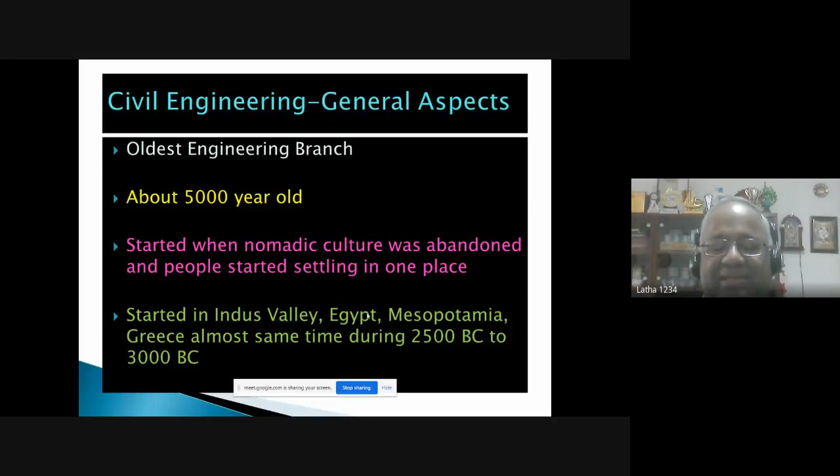At one point of time, they all felt it is good to stay at one place and try to live peacefully. So when that type of thinking came, people started reducing nomadic culture and started staying in one place. So when people were staying in one place, that is the time actual civil engineering started. If you know the history of the culture of people, the Indus Valley civilization started almost 2500 years before the birth of Christ in the Indus Valley.

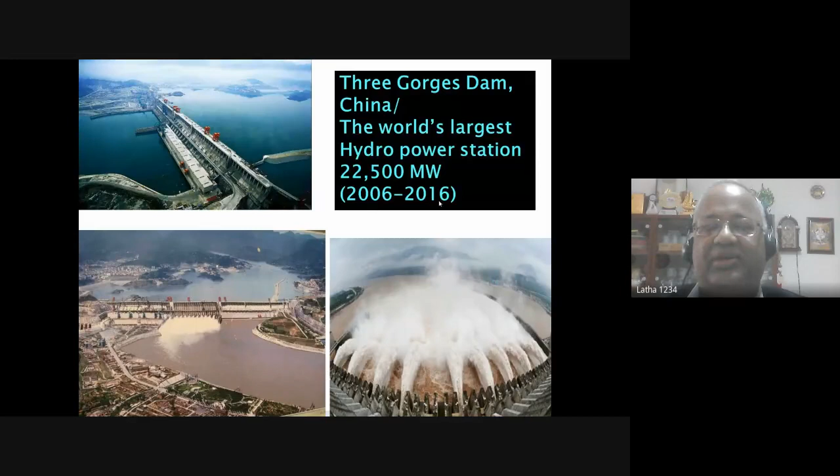Water retaining structures are an important element in civil engineering, like reservoirs and dams. One of the biggest dams built on earth is the Three Gorges Dam in China, with a hydropower capacity of 22,500 megawatts. Started during 2006, completed during 2016, in 10 years. So this is one of the marvels in civil engineering.

So like this, you can show thousands of examples of the marvels and the knowledge which has gone for infrastructure development, which is the basic requirement for any human being nowadays. Basic requirement for a human being, fundamental, basic, is house, road, water movement structure, sewage movement structure, reservoirs, bridges,

traveling, setting arrangements in hills, in valleys. So these are all the very, very basic requirements. And this is what a civil engineer is supposed to do. So with this background, I will now start the actual presentation.

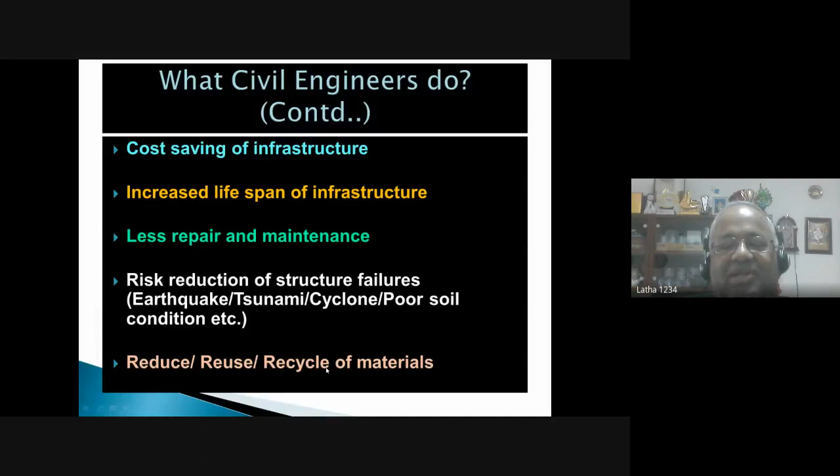And then the civil engineer also learns how to reduce the material used for infrastructure, or how to reuse some of the material. For example, waste plastics available nowadays, civil engineers use them for road construction for quality roads, or even recycling of material. Waste steel is recycled again as reinforcement. Waste plastics are recycled as good quality construction material. So these aspects also the civil engineer knows.

When I talk about civil engineers, the very noble person we all need to know is Bharat Ratna Sir Visvesvaraya. The whole of India celebrates Engineers Day by his name. He is a civil engineer. We all should feel very proud that a civil engineer is behind the Engineers Day celebration in India, not any other branch. I personally feel very proud as a civil engineer because of this, because he was the one responsible for developing many high quality dams and waterway infrastructure in India.

So now let's come to latest technology. For example, over the last 25-30 years, these items I'm going to mention have all occupied civil engineering development. Many new types of materials people started using.

A lot of lightweight concretes were invented, which people started using to make sure the building is light. And self-curing concrete was invented to accelerate the construction and curing process.

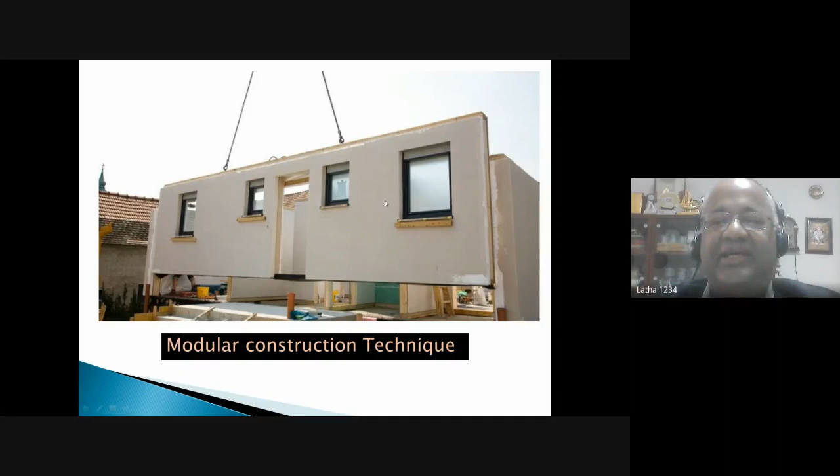These are all in the latest technology. For example, modular construction: nowadays people divide a building into a number of components. Say you need a home - people divide it into 10 or 15 components. Each component is made in the factory like a module, brought to the site, and assembled in a few days. That is the modular construction technique, so you need not spend a lot of time at the construction site. These are all made easily in the factory and then assembled within no time.

Higher and global education opportunities for civil engineers: after BE, you can go either to ME, MTech, or MS. After finishing that, you can go for a PhD. Some promising fields are structural engineering, geotechnical, environmental engineering, water resources, construction management, urban development, coastal and ocean engineering, remote sensing applications, and many more. These are all very promising for higher studies.

When we talk about jobs, everybody is finally interested in a job, whether in engineering or any other discipline. Basically, you can divide civil engineering jobs into three categories: either you work for government, state or central, or you work for a private company doing infrastructure development, or you can start your own industry.

Civil engineering is one of the best fields in engineering for self-employment. Nowadays many youngsters love to start their own industry. This is a trend we see now because of ease of getting loans from different government schemes. So people love to start their own construction industry, and it is really a good option, in fact.

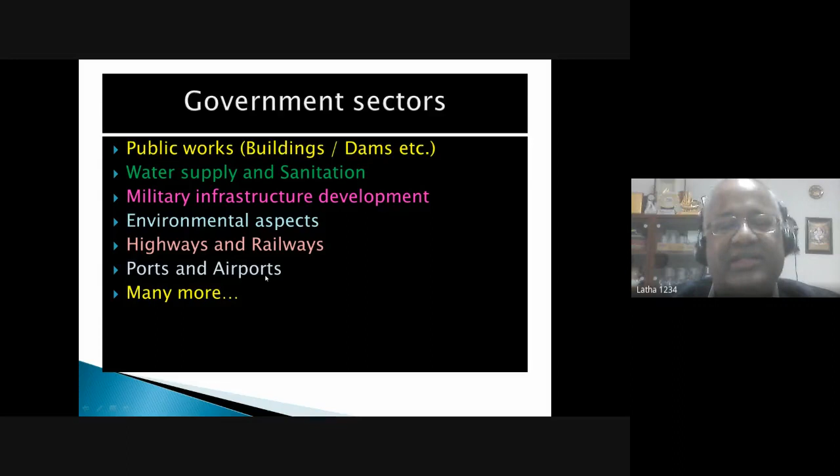So you work here as an environmental engineer, or you work developing state government highways or railways, or developing and maintaining ports, or developing and maintaining airports. Every port and airport needs civil engineers, and many more such roles. This is all under the government sector.

In central government, some are PSUs - public sector undertakings. Most of them have shares in the Bombay Stock Exchange and National Stock Exchange. In India, some of these are Oil and Natural Gas Commission, National Thermal Power Corporation, Indian Space Research Organisation, Defense Research Development Organisation, Bhabha Atomic Research Center, Engineers India Limited - they take a lot of engineers - and Gas Authority of India Limited. Like that, the list goes on.

Central Public Works, Coal India - engineers working in Coal India are responsible for exploiting coal fields. Indian Railway Construction International, and the Government of India also has the National Building Construction Corporation. Like this, many PSU companies are available for civil engineers.

After 4 years of engineering, if you write the Indian Engineering Service Examination through the Public Service Commission and get selected, you will work directly for the Government of India in many subsectors like Border Road Engineering Service, Central Engineering Service, Central Engineering Service for military road transport, and Central Water Engineering. There you will work to connect rivers or construct infrastructure in river and coastal areas.

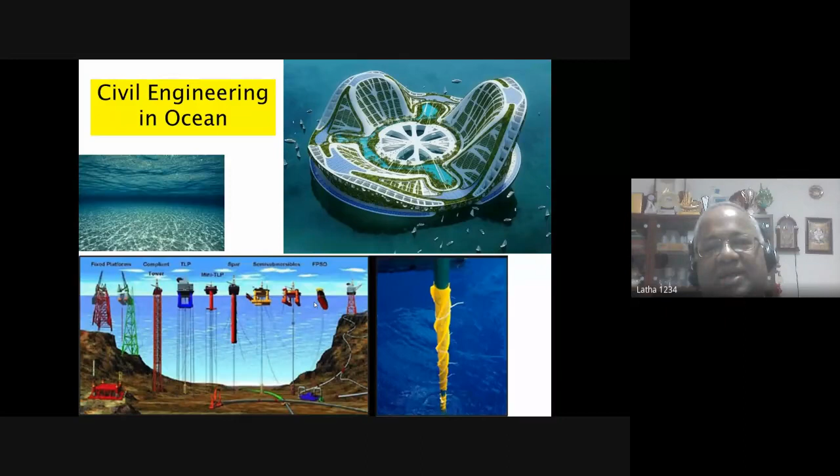Engineers working in the ocean to develop infrastructure, like floating homes or oil and gas drilling infrastructure, are well paid compared to normal civil engineers. Their salary is high because they have to design for a challenging environment and work in it. It's a risky job, but that is the joy of it. So they get a little better pay, civil engineers working in the ocean.

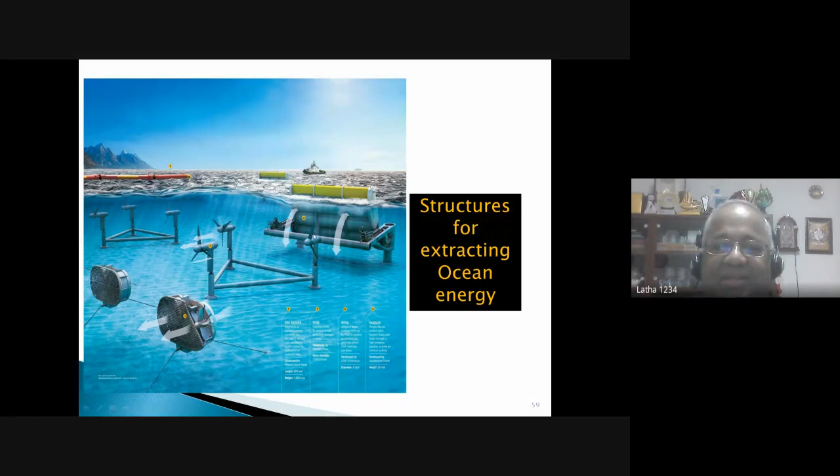Civil engineers develop infrastructure like coastal infrastructure, ports and harbors. They also develop infrastructure for extracting energy from the ocean. Though the final objective is energy, you need civil infrastructure. Without civil infrastructure, it is not possible to extract energy. So a civil engineer is required.

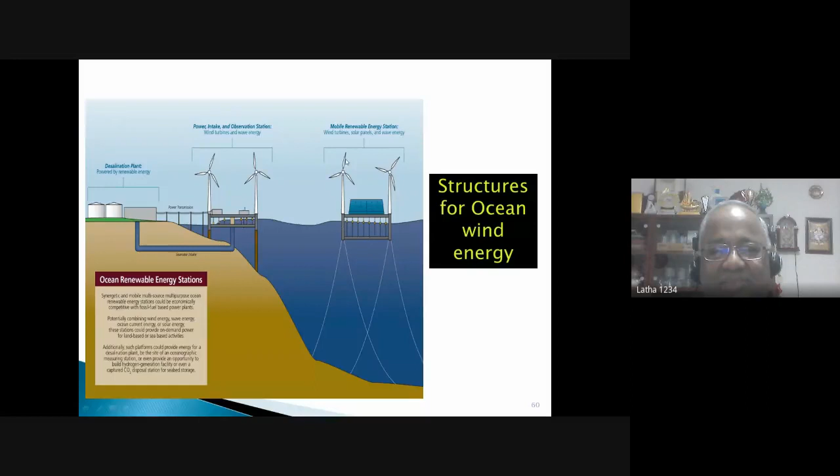Even for offshore wind energy, you have to build civil infrastructure. Or to extract energy from tide, you have to build a concrete barrage, like a concrete dam.

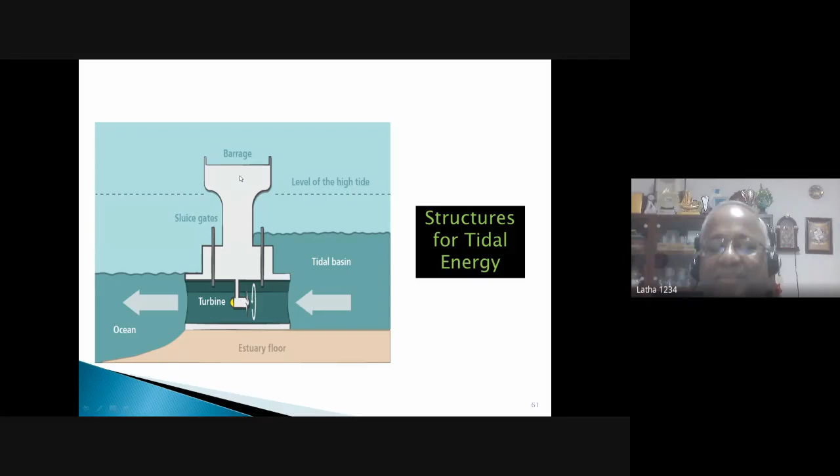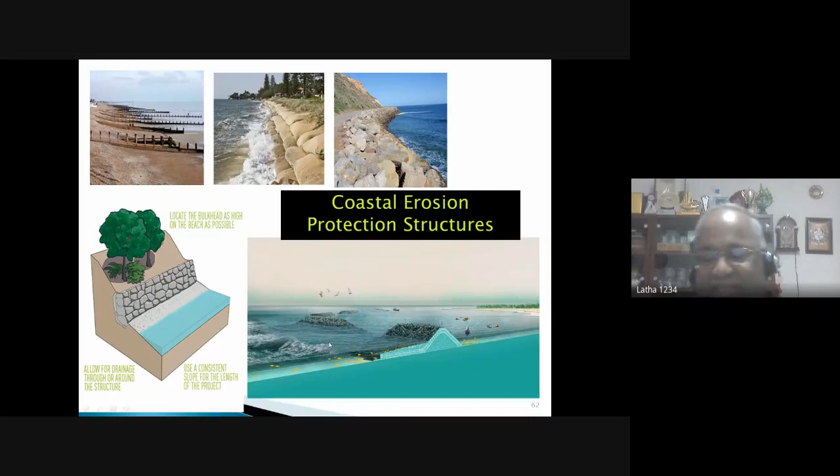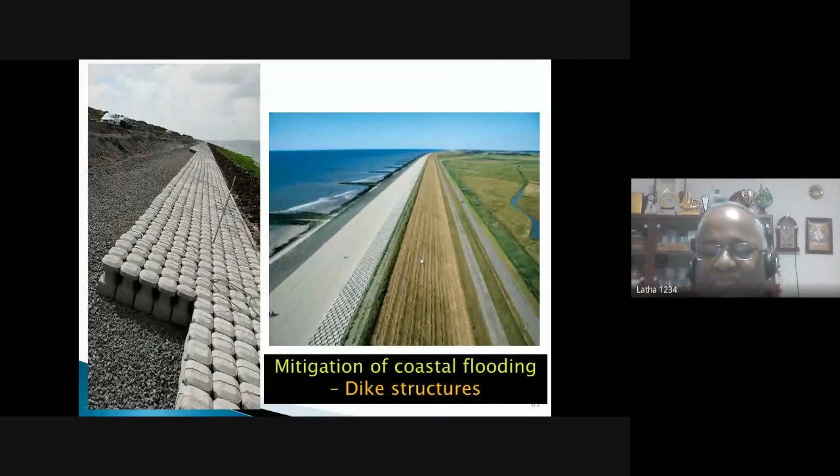These are all typical civil engineering structures. In the Netherlands, it is called a dike, a civil engineering structure. When the sea is rough, it will try to overtop into the land; to protect against such overtopping, people build this infrastructure. A very typical civil structure, but the knowledge we have to learn through proper courses.

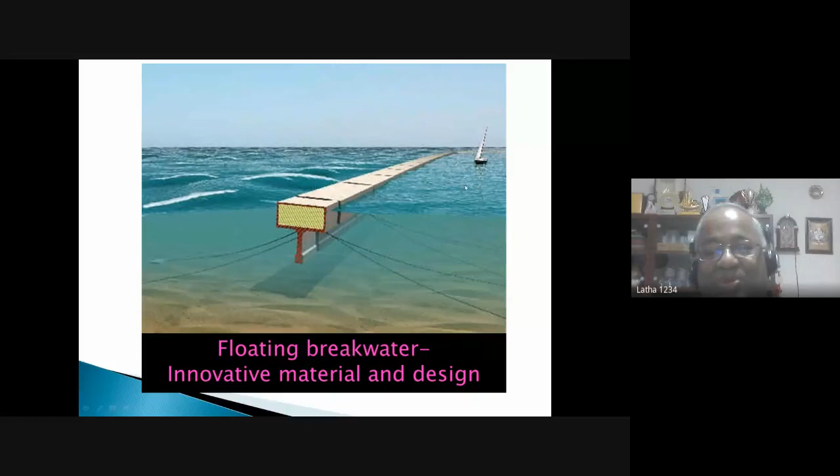Our people build innovative structures like this. It's open ocean here with waves, and civil engineers design what is called a floating breakwater. You learn all these things to make sure the waves here are very small for port operations, or even for construction, since people do construction in the open sea. So you need civil structures like that.

Or people make a new type of marina, where pleasure boats are parked, similar to car parking, but it's boat parking. These are all our inventions, civil engineering inventions applicable to coastal areas. We have patents for all these things. So you make concrete structures, beautiful concrete structures, which are not only cost effective but easy to build and easy to maintain.

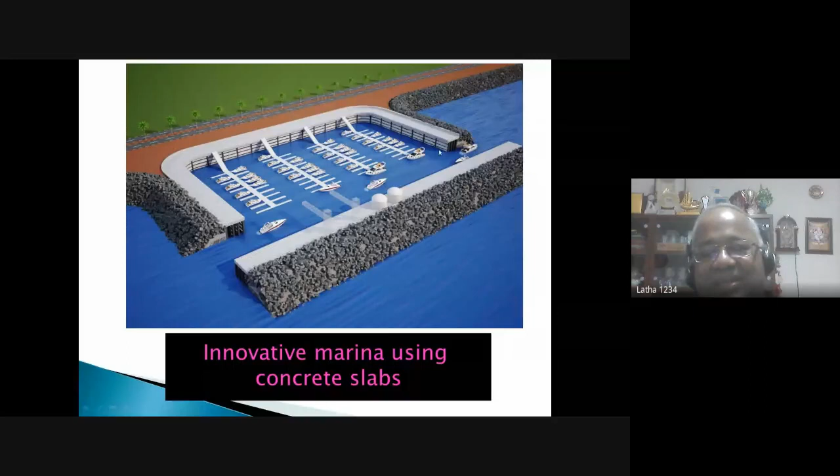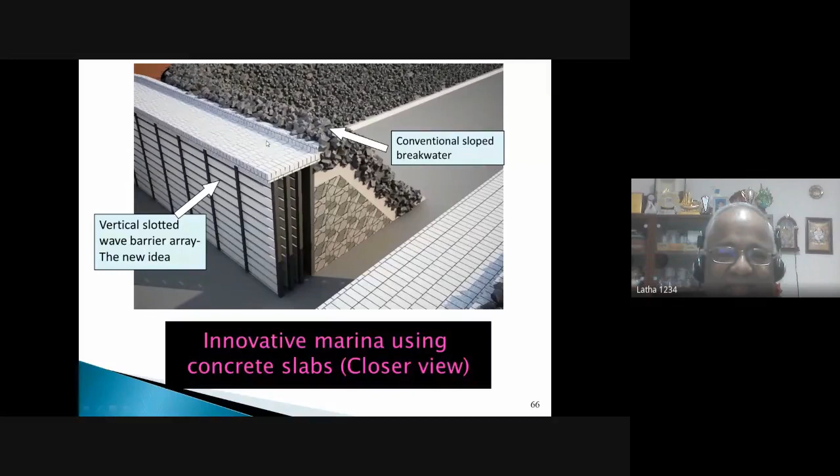So you will become an engineer in such things. Like this view you see here, we have replaced this conventional structure using an innovative wave barrier to dissipate wave energy. This is a typical civil engineering structure to be built in water, in the ocean.

Our people also protect the coast using a simple civil structure called geotubes. Nowadays people use these very widely. A good civil engineer knows how to select a suitable geotube to fill it with sand and protect the coastal infrastructure.

Motivation for somebody to become a civil engineer includes good life, respect in society, awards for good quality work, chances to go abroad frequently, opportunity to work with intellectuals, and better salary and perks. This is BE or BTech for 4 years, Masters for 2 years, and PhD if you love to do it.

A few minutes I wanted to tell you: after listening to this lecture, you may want to join a good engineering institute, a reputed engineering institute like BMS. You would love to join a good institute.

There are criteria: the institute should have a beautiful ambience, like BMS for example, highly qualified faculties, state-of-the-art library, lab and other academic infrastructure, and frequent exposure to the field. You learn the knowledge subjects, but then you should get an opportunity to go to field construction areas. Also, the institute should update the latest knowledge periodically, have a high placement record, a very dynamic academic atmosphere, be surrounded by high aim-oriented faculties and students, give opportunity to be exposed to the latest developments in civil engineering, and have excellent academic as well as non-academic facilities like sports and culture. These are some of the things you should look into before selecting a good institute.

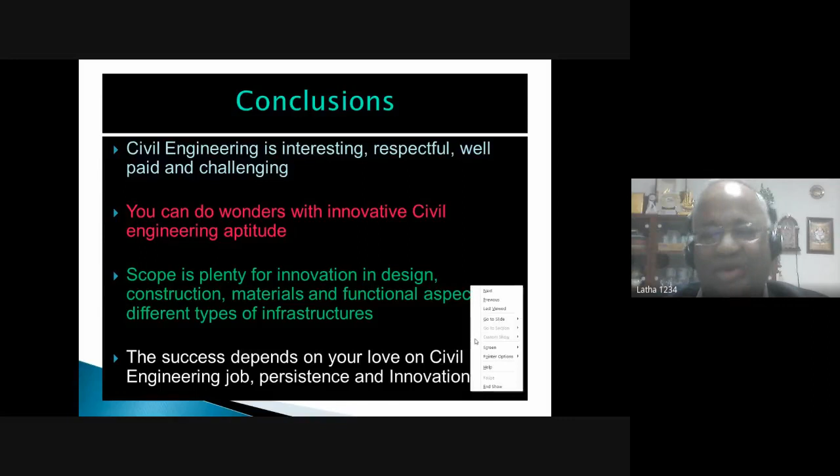Thank you, sir. It was really a pleasure to hear you speak, because this morning we heard you speak at an international conference as a keynote speaker. There's a lot of transformation from how you spoke then to now, because you spoke in such simple words, aware that our audience are kids or children who just cleared their second PU or 12th. So it was really nice, your humility. I really appreciate and thank you for that.